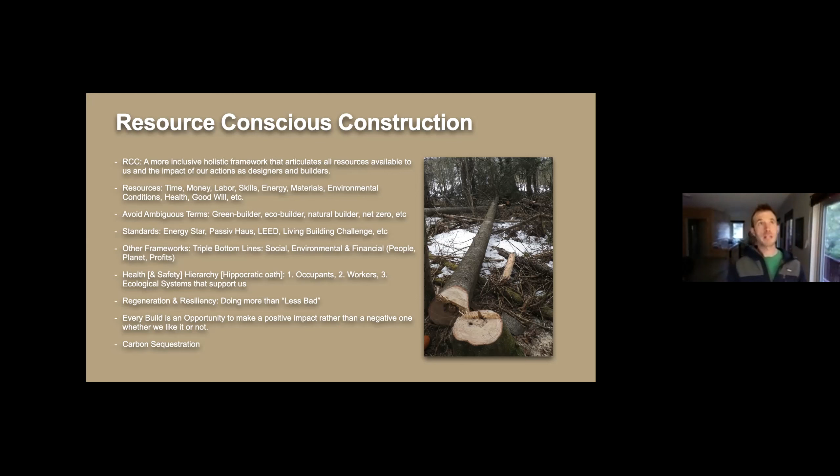The difference between being regenerative and resilient versus doing less bad, which is kind of the current paradigm in the green building industry, is how do we use the same energy as we produce, quote unquote net zero. And so trying to do better than that rather than doing less bad, we can actually be part of the solution. Like I said, every build is an opportunity to do that. We're looking not just at doing less bad, but even carbon sequestration if we can, and how to actually improve our site and our community with every build. Habitat for Humanity in the last 2 builds has committed to this direction.

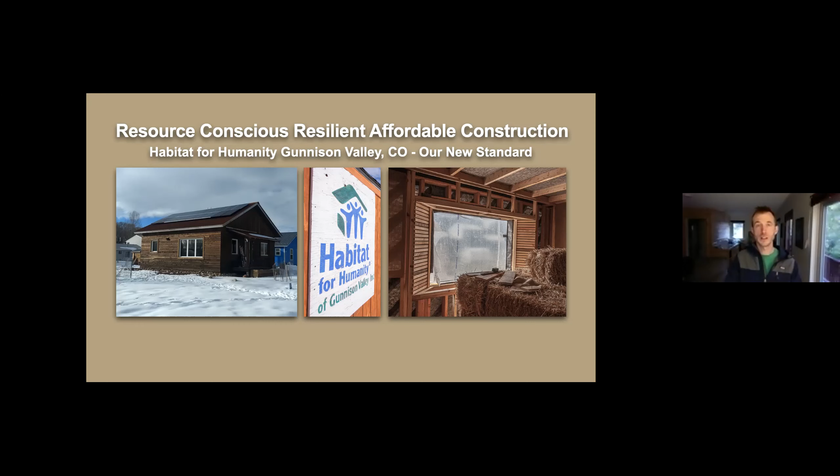And so that's our 2019 home from the exterior. You notice it's got solar panels on it. It's clad in local wood, and the interior used a combination of local lumber and straw bale and cellulose for its insulation.

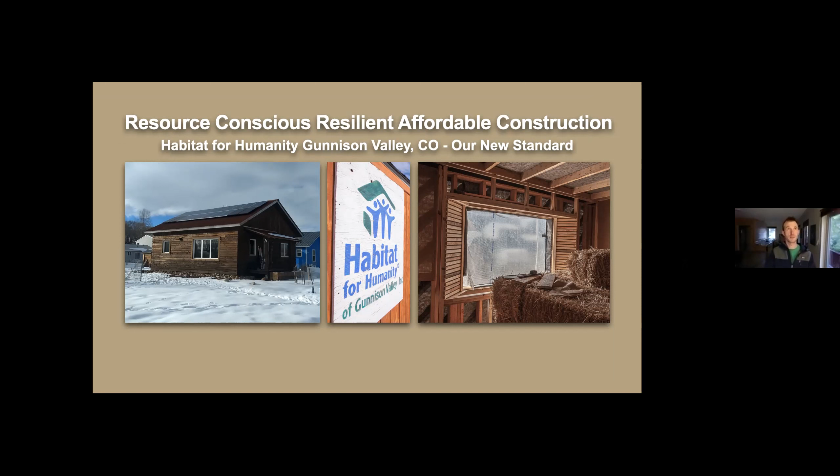And the program itself has been around since the mid-90s. They built one of the fastest homes, I think in the late 90s, a home from floor up in 14 hours. They provided 15 homes in the Gunnison Valley. Homeowners have to qualify, basically have to have a certain low income relative to AMI, the area median income, and then they have to put in 300 minimum sweat equity hours, depending on how many family members they have. We're building 1 home a year going forward, and it takes about 2,000 volunteer hours per build.

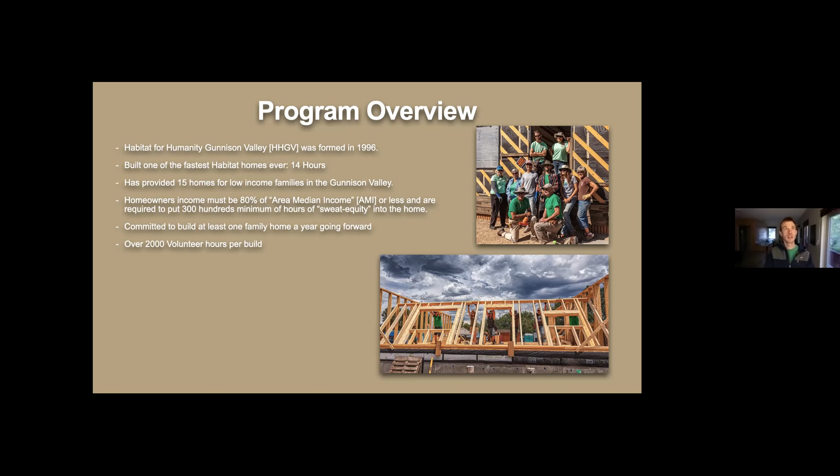Yeah, so our approach, like I said, with our program is we're trying to provide a home that has the greatest impact in our community, but also we're trying to actually monitor what we do, how we do it, and to learn ourselves and to prove the hypotheses as we go along.

So these homes produce more energy than they use, and so their electrical bills are basically only standing fees, and they produce enough energy to not only completely power their own homes, because these are all electric homes, including all their environmental conditioning, but also we use the excess power to power the construction on our job site next door, because we currently are building one block or one site at a time, working down a street.

So some of the metrics that we use on our first home for seeing how it performs is we have temperature and humidity monitoring in all the walls, in the ground and in the roof. We have indoor air quality monitoring to make sure that the quality of the air is up to basically the highest quality that we can get. We monitor our energy consumption and production.

We have a vague idea of how much money, like I said, $30,000 to $40,000 from that home stayed in the local economy. How that actually impacts the local economy, I don't know. But if there's any students or economists out there that would be interested in developing that, I have a couple of leads that this winter hopefully we'll be able to get some kind of solid numbers around how the actual finances of building locally impact not just us, but how that knock-on effect happens in our economy.

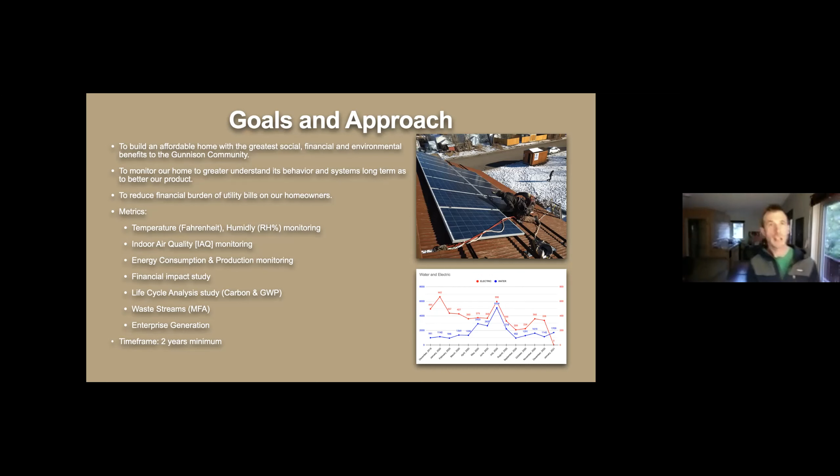The home that we built in 2019 was a 2-bedroom, 1-bath, 1,000 square foot home. It was a $230,000 cost to the homeowners, and that included land and contractor fee. It took us about 8 months to build it. We focused on local materials, like I said. 90% of the material was from within 100 miles.

We used straw, cellulose, wool, hemp, and the windows were made locally. The windows are made in the Front Range. The metal was rolled in Montrose. The cabinets were made in the Front Range. And so we really tried to focus on either grown, processed, or produced in Colorado or within 100 miles. We did energy modeling on the home before building it.

And so the peak heat loss of this house is 6,000 BTUs per hour, which, to give you some context, is about 20 people doing yoga at 20 below to keep it at 70 degrees. So basically, in the case of a complete power outage, this home will never drop below 50 degrees, even without anybody in it. And so we're actually looking at a frost-free house. That's not only low energy, but high level of resiliency.

Yeah, the average energy per year is really small, and that allows us to have a smaller solar system on our home in order to get the energy that we need to run it. And so we have an average size solar system on that house, but because of the low load, we have enough to power our build and even electrical generation or electric vehicle charging if we need it in the future.

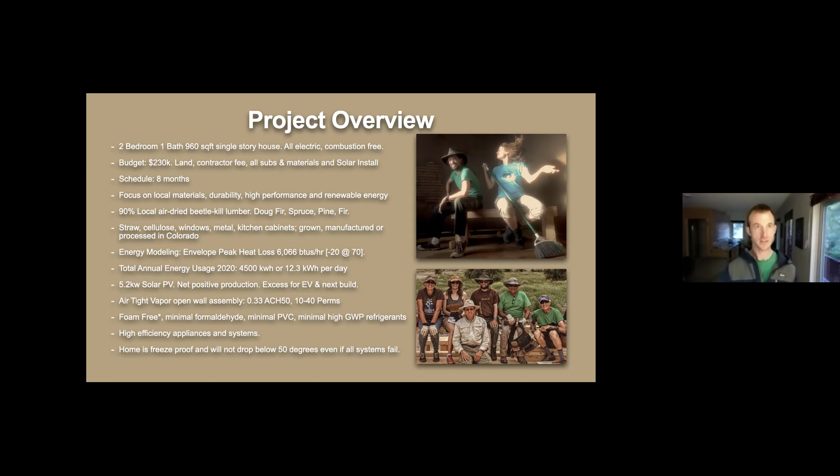We certainly didn't do this alone. We've been very fortunate since we started this project to make very valuable connections with local programs that are doing fantastic work and are really supportive of what we're doing. The SOAR program in Crested Butte, and the students there, high school students, before I was even hired, started designing the home. And so I worked with them a little bit to integrate their designs into the final product. We're hoping to do more of that in the future, and excited about how to bring those students on site in the future.

The Gunnison High School students, similarly, every year for Habitat, they've built a shed for us. This year, we're working with them and Mountain Roots to build a greenhouse instead, which by default is a shed. So we're pretty excited about that. They're actually going to come visit the site on Wednesday. Mountain Roots have been helping homeowners to make their gardens more productive. Again, we're excited about that to develop.

And Western University, the MEM program, and various professors and students have come and volunteered, but also Rich Strongberg in particular has been a valuable asset in monitoring our homes and being a real scientist behind my kind of pseudo science.

And the Coldharbour Institute has just in general amazing potential for working together in terms of developing educational opportunities where we could train students through the Institute, but also have a classroom of Habitat for each of our builds to create an educational program. And we're just starting to talk about that. And Equitable Solar Solutions, a program of Coldharbour, has been providing us with solar, again with Rich Strongberg leading that program. Here's just some of the other partners that were involved, and I'll skip through that.

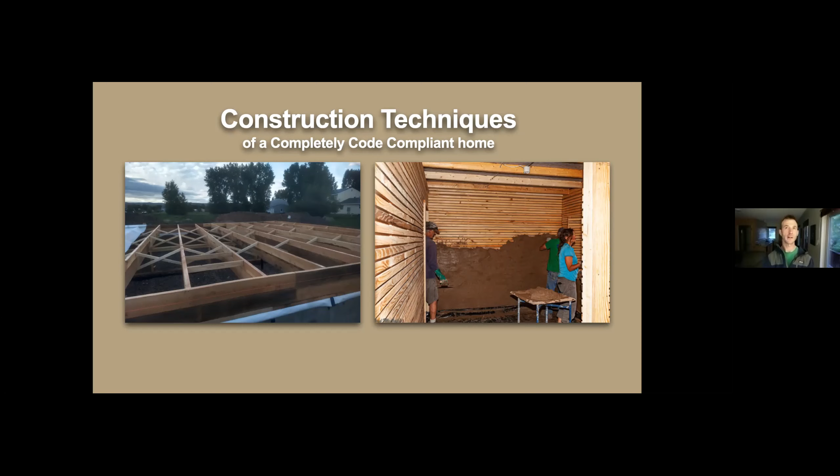And so natural building, quote unquote, if you're working with raw materials, is just inherently going to take more labor. But with Habitat, we have free labor, and so we can kind of offset costs. So it's a little hard. I know someone's going to ask me how much these homes would cost out in the real world at some point tonight, and I really want to have those numbers, but just don't have a great way to quantify it right now. But I always try to start by building something the way I think it should be built, and then figuring out how to do it faster and efficiently. So with this home, we definitely wanted to just go all out, make it as ecologically sound as possible, as high performance as we could, and also aesthetically pleasing.

So what you're looking at here, this is the floor system, which is all Doug fir from the San Luis Valley. It's a 16-inch deep floor system that got filled with cellulose insulation. On the right-hand side, that's lath and plaster, like a traditional wood lath.

So we had a very fortunate volunteer that ripped a lot of that wood out of some of the poorer quality lumber that we got, and then we plastered it with clay plaster. This clay ended up coming from the Front Range. Some of it came from Tomichi, and then the sand is all from the Tomichi Basin.

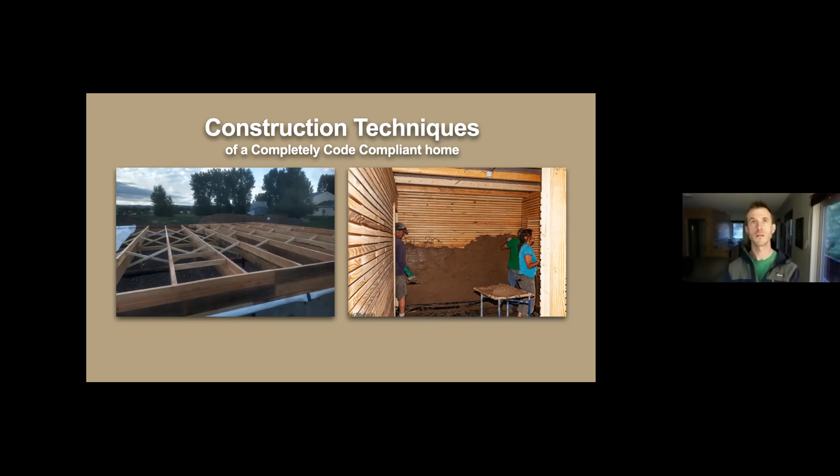I mentioned earlier that the envelope has a breathable wall system. And like I said, breathable isn't a very technical way to describe it, but essentially what you want in an envelope is one that can deal with moisture. And you also want to have fresh air in your home to be able to physically breathe. And those are two related but different things.

And so with our home, one of our hypotheses was we were trying to build the most affordable high performance envelope we could. And in my experience, the way to do that is to basically make a bag around your home and to have it as vapor open as possible, which is what usually people mean when they say breathe. So that means if any vapor, any moisture does condense in your envelope, it's able to dry seasonally, or it's able to hold that moisture seasonally without any problems.

And so in this dry climate, we don't need to have a vapor barrier in the interior, which was part of our hypothesis. And so wood, straw, cellulose, recycled paper, hemp are all very similar makeup. They all contain a lot of cellulose and lignin, and they essentially are almost the same materials or have a lot of the same elements in them, but they're just assembled in different densities and different patterns. And so wood, straw, and cellulose all behave very differently.

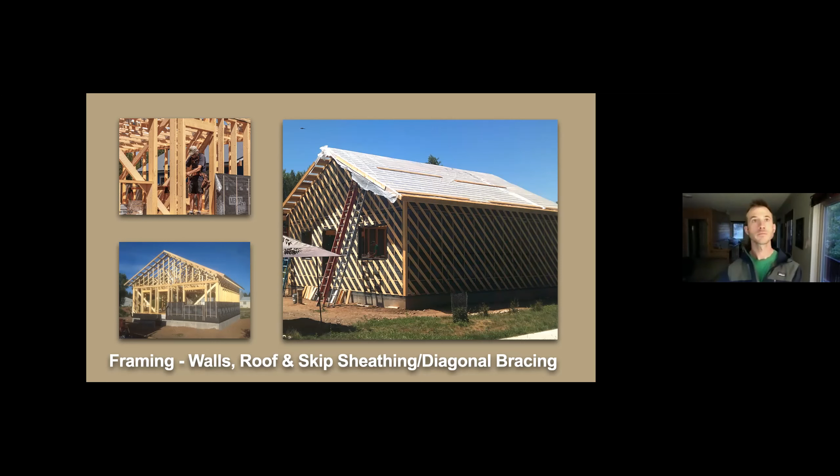Here's some of the insulation details. We built a straw cellulose hybrid, and so we built a stick frame, 2 foot on center, like I showed, without sheathing. We filled that 6 inches with cellulose, and then we strapped our bales to the interior.

So in our climate, which has a high heat demand, a single straw bale has disadvantages in terms of performance. It's about an R30 wall, give or take. A lot of factors, the density of the bale and how it's installed, etc. And then you have to plaster both sides. And so in our climate, we have a short season for building.

And so by building with a more conventional exterior, we can avoid plastering the exterior. We have a limited window for doing plastering, because you don't want to plaster in the winter, because with any wet trades you'll have freezing and cracking in your plaster. And so this way we can have a more conventional exterior. We can get an extra 6 inches of insulation, which bumps our wall up to R50 instead of R30, which makes a huge difference. But then we get the advantages of the straw bale on the inside.

We put 2 feet of cellulose in the attic, which is R83. We put wool instead of spray foam around our windows. We used donated denim for soundproofing on our interiors, as well as some straw clay and other natural building techniques on our interior walls. On the left-hand side, you can see that's a big hammer. One of our volunteers is bashing the straw bales into the walls.

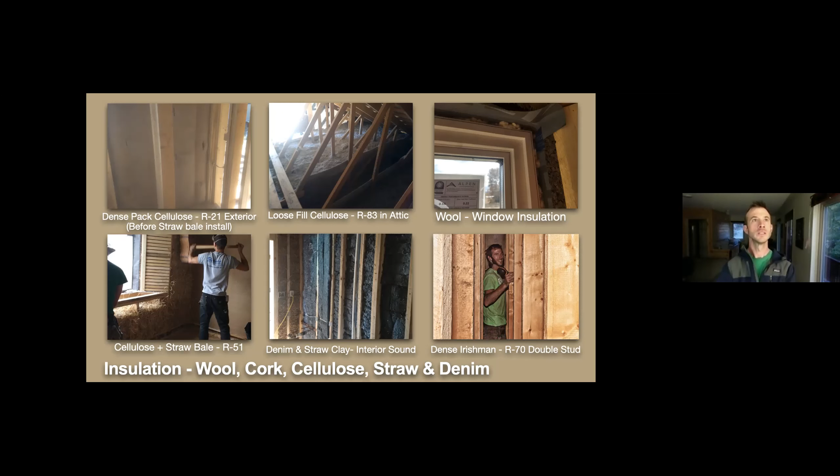I've avoided that in my work just because I have a mission to try and make these ecologically sound building practices more widespread. And the aesthetics are important, and I've heard people look at round straw bale houses and say, well, it's cool, but I don't want round, I want straight edges. So I focused on trying to make homes with the same techniques that are more palatable to a more conventional aesthetic. But as you can see, behind the surface, we've got straw clay, we've got traditional techniques of lath and plaster.

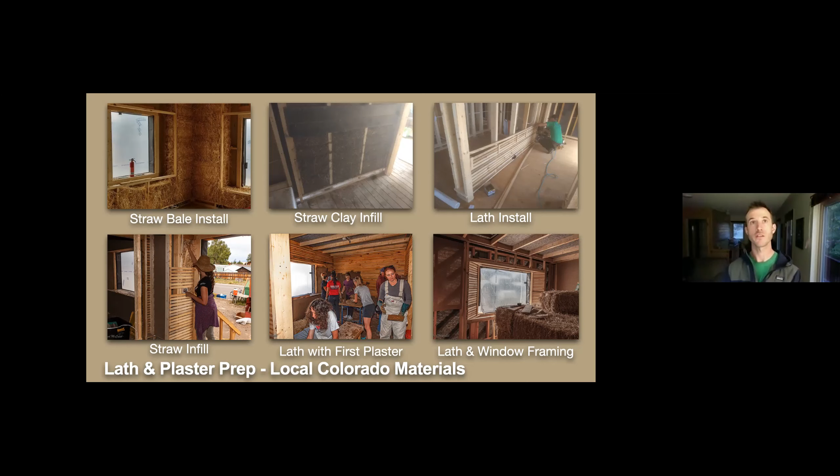Habitat International actually gave us an award last year, for a category they created for us called Best in Low Carbon Footprint, to recognize what we had done. But afterwards I discovered that's the direction Habitat International is going. Not quite to our length, but they're looking at their full impact. They're not just looking at energy efficiency, they're looking at emissions and toxicology and improving their codes and their recommendations in general as an organization.

And as the 10th largest builder in the US, Habitat does a lot of building, but also in terms of how they influence communities, they're a fantastic way to disseminate this kind of approach. So I'm pretty excited about continuing that.

And since we got this recognition on the state level, we've had a lot of visitors from other affiliates, and in fact, Chaffee County in particular was pretty excited to follow some of the things that we've done and learn for themselves and try their own version. But as you can see from the pictures, it doesn't look too crazy. It looks like a fairly conventional home, and yet we were able to achieve that with predominantly local materials.

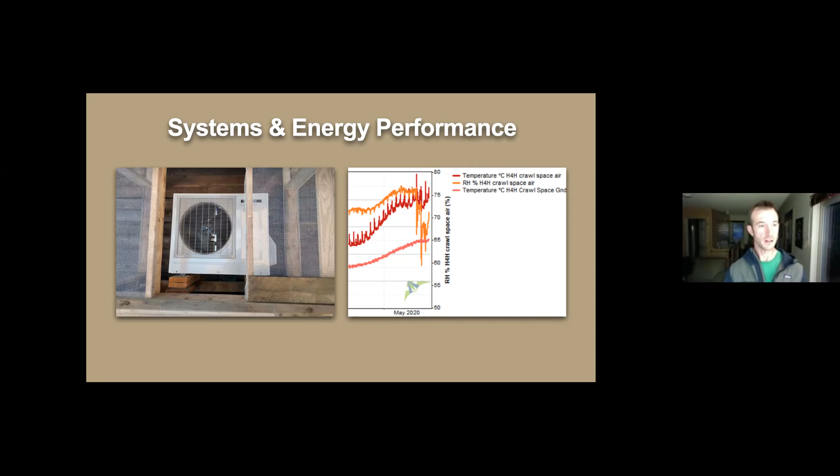And so I get into that altogether. That's a big conversation about materials. But our thermal envelope, I like to put our money and our energy into that first before anything else. So this building is basically passively heated from the ground and from solar gain to keep it above 50 degrees. And even if you didn't have any passive solar, I think the ground heat that it captures would probably keep it above freezing too.

An easy place to make big energy savings is our windows and doors. If we were able to mandate higher performing windows and doors, that would be a huge step, because they're essentially holes in our envelope. If we make our walls 20 feet thick with insulation, our windows are still a huge heat loss. So at a certain point, improving your wall systems or your envelope with insulation, you're getting no gains or very little gains compared to air tightness and improving your windows and doors.

So this home, and actually we just did a blower door test a few weeks ago on the current home, are some of the tightest homes in the county, at least the tightest ones that I know of that I've tested. We do all our own energy modeling and air testing. Like I said, if we have a normal home that has really efficient systems like heat pumps, those systems can break down, and the home itself then is not as resilient. By putting our energy, our money and our resources into the envelope, by default, we have a very resilient home.

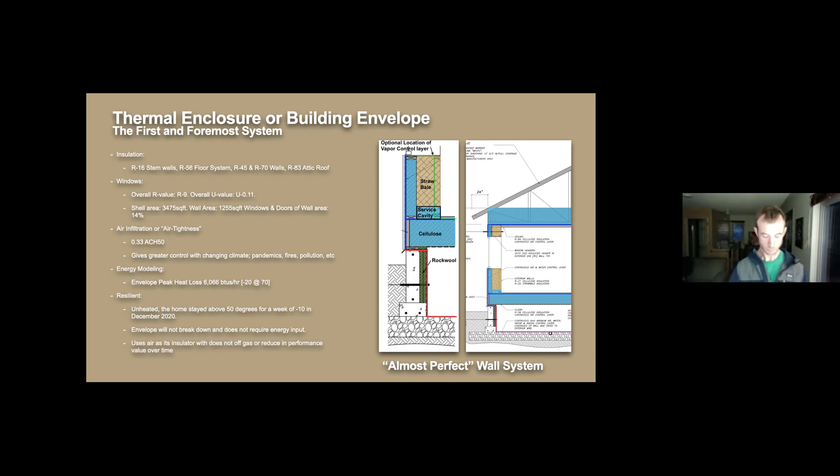It uses a heat pump to extract the energy from the exhaust air and then transfer it to the incoming fresh air. But because it uses heat pumps, it's able to control humidity as well as do air conditioning, which this home has never needed, I should mention. The homeowners had it set at 80 degrees, and in the last 2 years, the home has never passively gotten above 80 degrees in the summertime.

Our hot water is heated from an exterior heat pump that uses CO2 as a refrigerant, which has a GWP of 1, because it's basic carbon dioxide. So that's as good as you're going to get in terms of a heat pump. It's a pretty expensive unit, but it's super efficient, really effective, and actually will work down to 30 below. It'll still produce heat, not super efficiently at that temperature, but it'll still produce heat at 30 below.

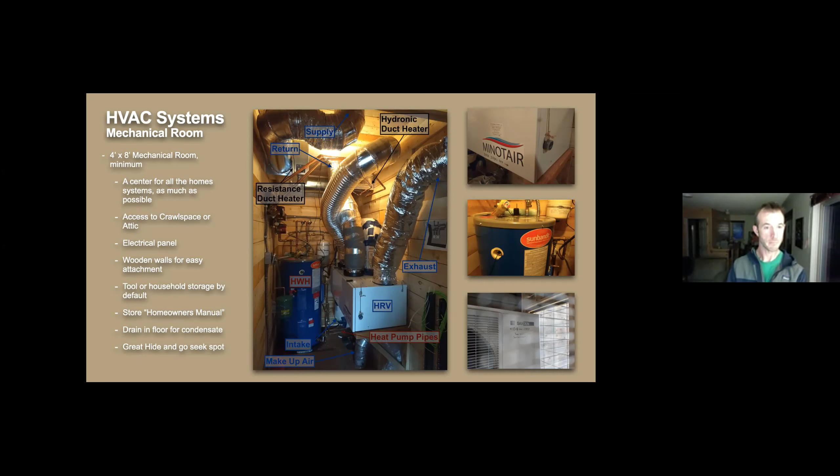The design process is really important. I think with the technology that we have with three-dimensional design at this point, designers and architects really should be integrating systems and doing energy performance as part of their service, so they can actually understand how the building is going to perform.

We haven't always had that technology or those tools, but they're pretty readily available now. And so I think at this point, there's no excuse for the designer not being responsible for not only the energy efficiency, but also, if they're specifying materials, the environmental impact of buildings.

Basically, our home has a balanced ventilation system, and that's what provides all the heating and cooling, which means we bring fresh air into the home, into the bedrooms and the living areas, and we extract it from the laundry closet and from the bathroom where we have stale air.

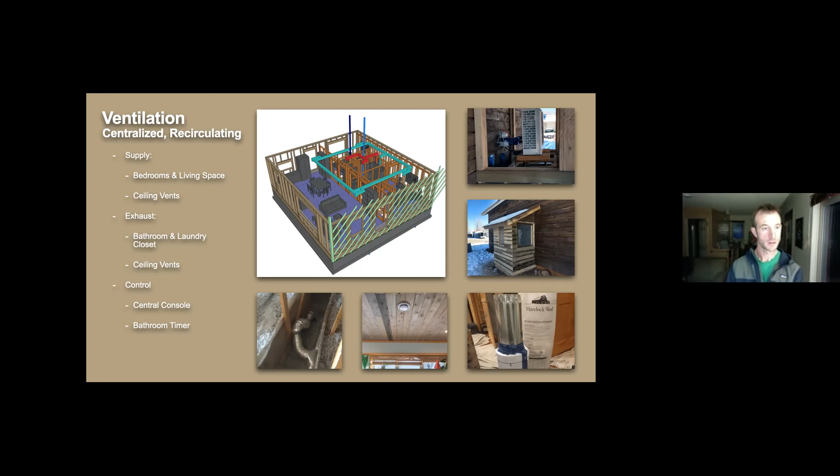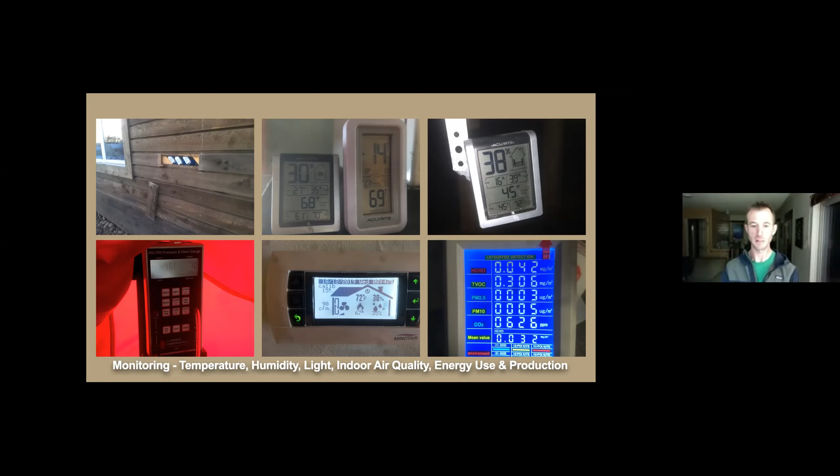That's a pretty important thing to know in this home, because cooking effluent is fairly impactful, particularly if you have combustion, but we don't have any combustion in this house. But the biggest air quality risk we had in this house was cooking, which is pretty typical. But even then, our systems clear the house very quickly.

All right, any questions on that? I know we're running out of time.

Do you see or know of any new promising material technologies that would improve current builds or further improve future builds? From Anna Markey. So Anna, in my opinion, we're at a super lucky time in history that we have all the technology we need to do so much better. What we don't have is the will or the awareness. And so I would say we don't need any more new technologies. It doesn't hurt. And certainly improving the technologies is going to happen.

So particularly heat pump technology, I would like to see that HRV system that we have in the first home have a larger heating capacity. There's competitors that do a bunch of really cool stuff like integrated air quality monitoring and smart sensing, where they basically don't refresh the air in the house unless they sense the CO2 levels. Super smart. And I'm pretty excited to get my hands on that HRV, but it has a lower heating capacity.

So heat pump technology, being new to the US, is still figuring out some of the kinks and what strategies to use for approaching the market. But we have the vast majority; even 10 years ago, we didn't have the technology that we have now.

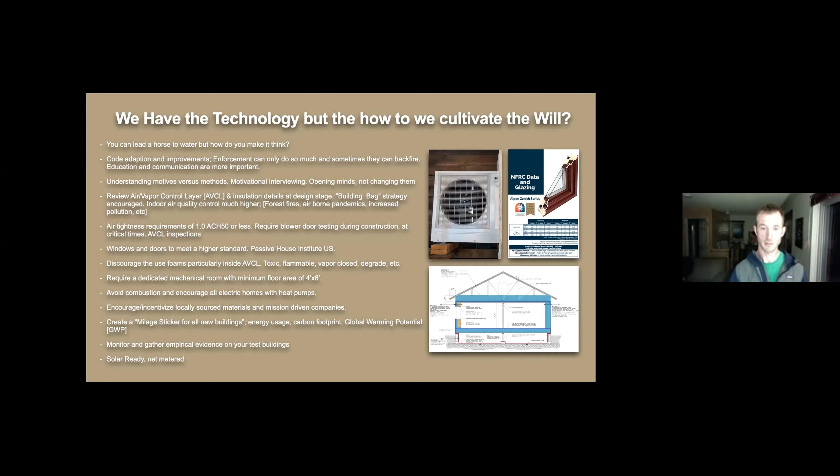Any questions? And then there's a bunch of really cool online resources and great people doing great work, if anyone wants to ask more questions, basically from the people I learned anything I know from.

And I had a question regarding already built homes. I think you've slightly touched on this by having energy efficient doors and windows. Is there anything else that people can do to improve the efficacy of already established built homes? Absolutely. And actually, there's a lot of affordable programs for that, which can either fully pay for or subsidize. GV Heat, I'd recommend looking up GV Heat. They administer a few different programs.

They do the CARES program, the weatherization, what does it even stand for? WAP, W-A-P, there's the Green Deed program. And that's part of something my business does also, is we do deep energy retrofits, working with those affordable programs.

We're also getting into radon work, which radon mitigation from a health perspective is a really important thing to do. But actually we can get multiple benefits by doing radon, particularly in new buildings, but even in retrofits, we can make the house have a lot less radon. We can make the house more airtight, and we can prevent vapor from getting into crawl spaces if we are able to get access to a crawl space.